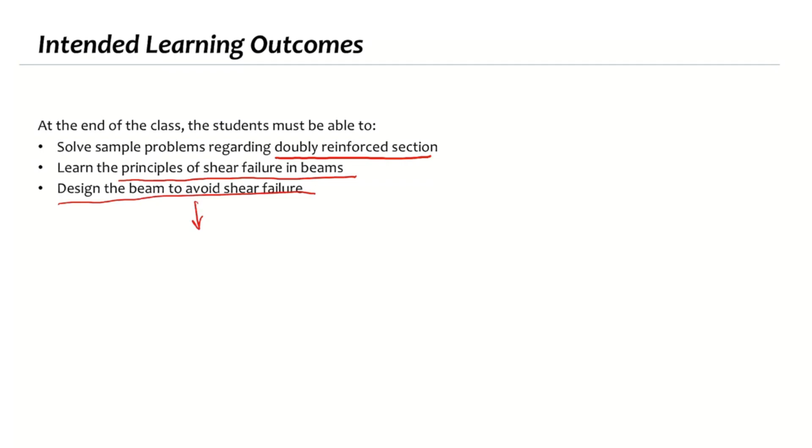Our intended learning outcomes for this module are that by the end, students must be able to solve sample problems regarding doubly reinforced sections, learning the concept behind doubly reinforced sections. We will also learn the principles of shear failure in beams, why shear failure is more dangerous than flexure failure, and how to design the beam to avoid shear failure by designing the spacing of stirrups.

Now let's talk about doubly reinforced beams. Doubly reinforced beams are those that have reinforcement on the compression side. Why do we need to provide reinforcement on the compression side? That is because our concrete is not enough to provide the necessary compression force to counteract the tension.

What we learned so far is that we have compression and tension in our beam, and compression is equal to tension. When solving a singly reinforced section, we always start by saying compression force equals tension force. However, if we increase our tension force, it will result in a corresponding increase in compression force, because compression equals tension. So if tension increases, compression must also increase - both of them must increase.

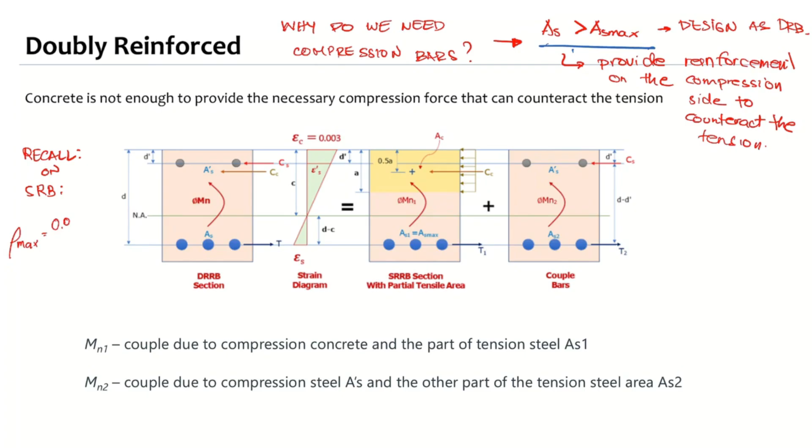Okay, let us recall singly reinforced beams. Recall on SRB, what is our maximum steel ratio for the singly reinforced condition? Maximum steel ratio for singly reinforced condition, rho max. I will give the first part: 0.85 FC prime beta over Fy.

What is the factor here? What is the factor for rho max? That will be 3 over 7. And this maximum steel ratio for a singly reinforced beam is taken at a corresponding strain of 0.004. It is taken at a corresponding strain of 0.004.

However, we also have another ratio, which is what we call rho 5. That Ro 5 is taken as 0.85 FC prime beta 1 over Fy. What is the factor for rho 5?

It is 3 over 8. And what is rho 5? Can you give me an explanation on what is row 5? What is row 5?

That is the maximum steel ratio for a tension controlled condition, no? So that means we can say that this rho 5 is the maximum amount of reinforcement for an SRB, for a singly reinforced beam with tension controlled condition.

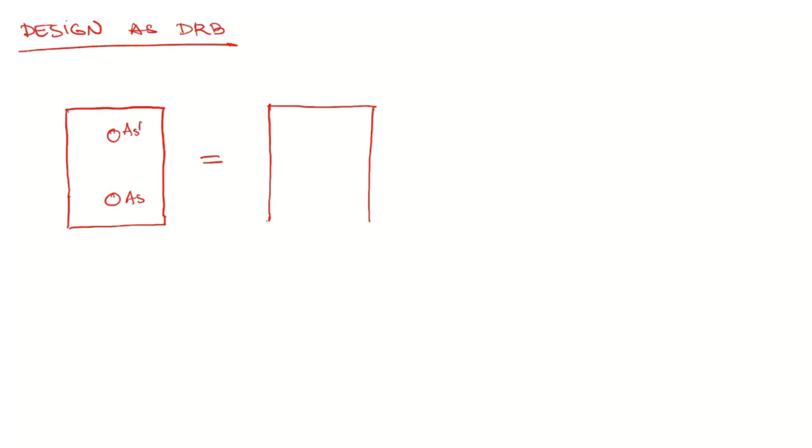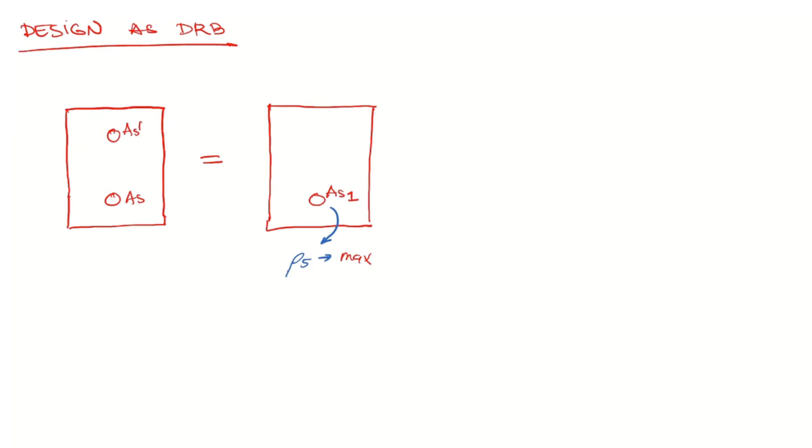So what we are going to do is divide them into two types of section. The first section will be the maximum singly reinforced beam for a tension controlled condition, and we are going to provide that AS1. So we will provide AS1, and this AS1 will be based on what we call rho 5. That rho 5 is your max amount of reinforcement

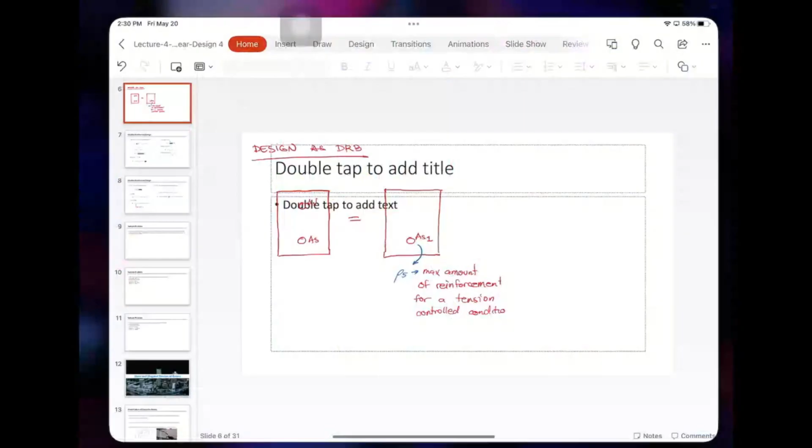For a tension controlled condition. Okay, so that is the maximum amount of reinforcement for a tension controlled condition.

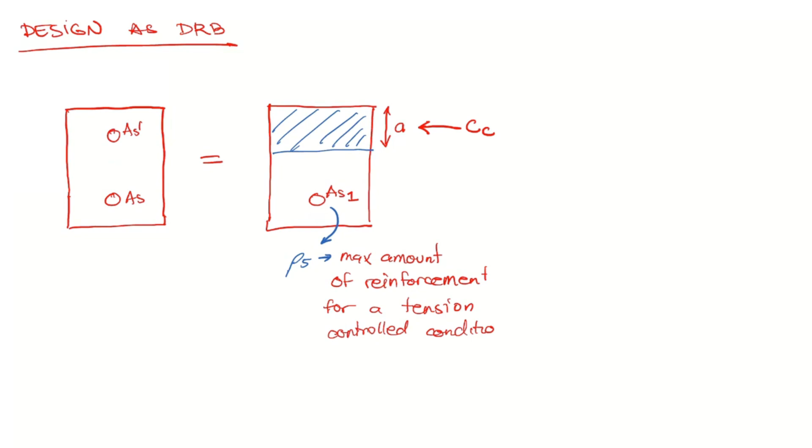So that AS1 will be counteracted by your compression. It will be counteracted by your compression due to concrete, or compression block as we call it. And it will have a depth of A. Compression block or compression due to concrete is acting at the center of the compression block. And we have tension at the bottom, which is T1. The distance between the compression due to concrete and T1, that will be D minus A over 2.

And this is actually our singly reinforced beam, SRB. And this is SRB and tension controlled condition. That is SRB and at the same time tension controlled condition.

And then we are going to add additional compression steel because our concrete cannot handle the compression anymore. So in doubly reinforced, we want to add more tension bars. So we will add tension bars which is AS2. However, our concrete cannot provide the necessary compression force anymore. That is why we are adding what we call AS prime. So AS prime is your compression steel. So your compression steel will have a corresponding force of CS, and then this will have a corresponding tension of T2. So the distance between the two forces will have D minus D prime.

Okay. So looking at section 1, section 1 will produce a moment due to the compression in concrete and the tension at the bottom, AS1, it will have a corresponding moment equal to MN1. It will form a moment because of the couple. And then section 2 will also form a moment because of the couple. It will form another moment MN2.

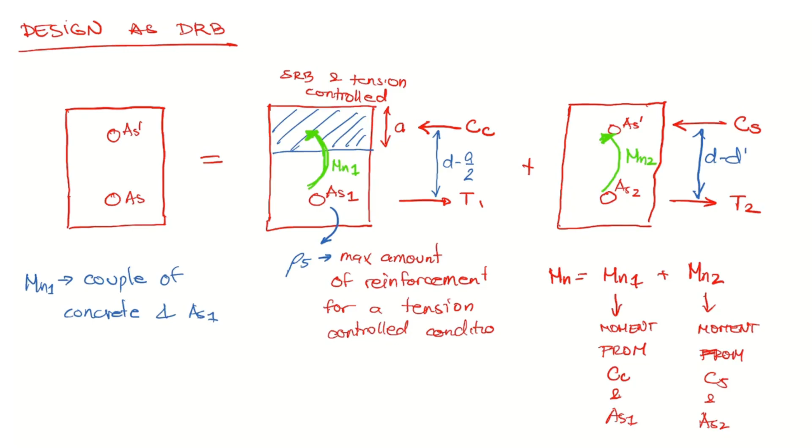Again, Mn1 is coming from your couple, that is the couple of concrete and AS1. Mn2 will be the couple of compression bars and AS2, additional tension bars. So that is the concept of doubly reinforced.

Take note that for section 2, we are not considering the concrete anymore. Because yung concrete natin, nagamit na natin sa section 1. Pag-a-addin mo sila, hindi po pwedeng maging redundant, no? We are not considering the concrete.

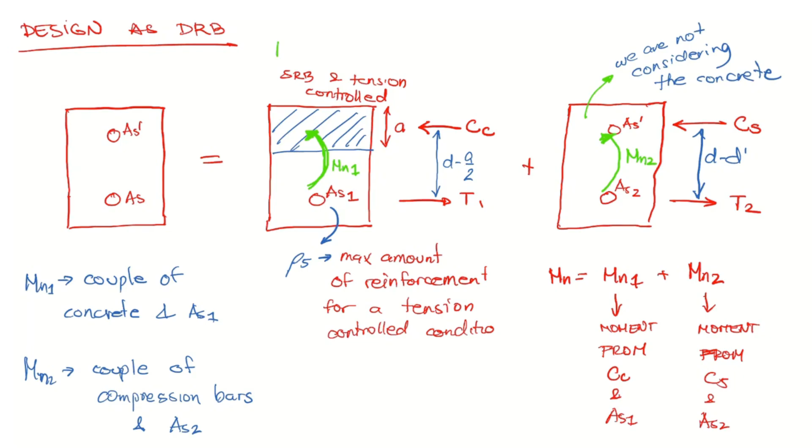Again, simplifying, this is your max for SRB. The first one will be max for SRB with tension controlled condition. And whatever is the excess moment from SRB, it will be carried by your compression reinforcement. Whatever is the excess from your singly reinforced beam, it will be carried by your compression reinforcement.

So far, are we clear with the concept of DRB? Do we understand? We get the maximum for SRB. Whatever is the excess, kung ano man yung sumobra doon, it will be carried by your compression steel. Because your concrete cannot carry it anymore, hindi na kaya ni concrete. So, tulong yung compression steel. That is the main concept of our doubly reinforced beam.

So how do we calculate the reinforcement for doubly reinforced design? You already know na meron po tayong two sections that we are considering. So let me just draw it here. Coming from AS and AS prime, we are going to consider two sections: one with concrete, that is AS1, plus another section with AS2 and AS prime.

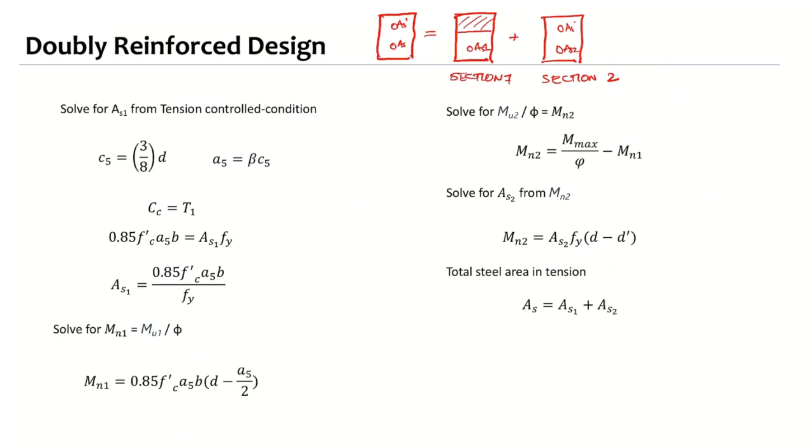This is section 1, section 2. So the first step is to solve for AS1 coming from tension controlled condition. We already know that for tension controlled condition, the maximum strain or the minimum strain that we can consider is 0.005. And we learned from our discussion on singly reinforced beams that if we are considering a strain of 0.005, your C, your depth of neutral axis, is taken as 3/8 of D.

Saan na nga po galing yung 3/8 of D? Where do we get the 3/8 of D? Based on our discussion in singly reinforced. Where do we get that relationship? Let me give you a hint.

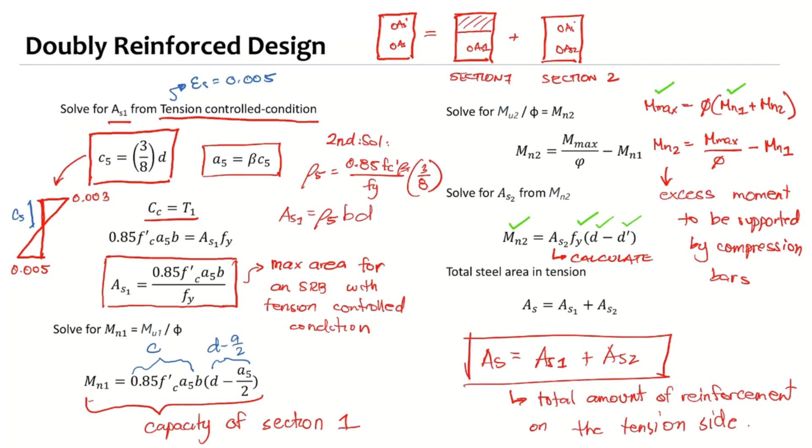And to calculate for the amount of compression bars, the first step will be check the strain of the compression bars. I-check po natin yung strain ng compression bars by using a simple formula. Fs prime is equal to 600 multiplied by C minus D prime over C.

So if yielding, then Fs prime will be equal to Fy. And Mn2 is equal to As prime Fy minus 0.85 Fc prime. This is actually your compression steel force, stress multiplied by area. Later you will learn kung bakit po may minus na 0.85 Fc prime yan. Multiply by the lever arm, D minus D prime.

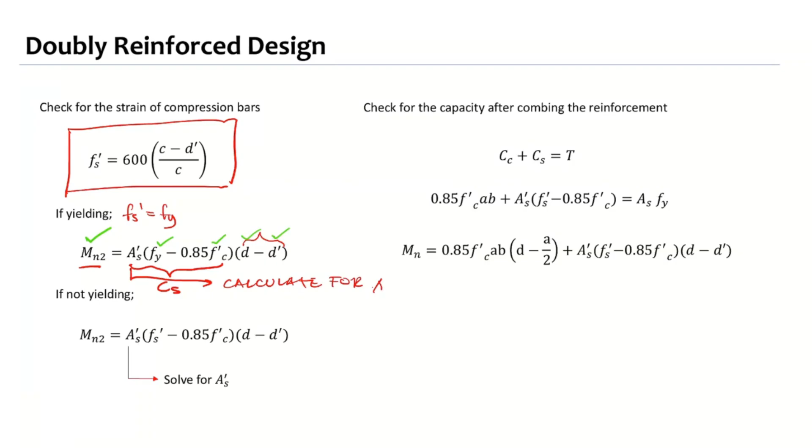So using this equation, since Mn2 is given, you have Mn2, you have Fy, you have Fc prime, you have D prime, you can now calculate for As prime. Calculate for As prime, you can now solve for the amount of compression reinforcement.

You can now solve for the amount of compression reinforcement.

If not yielding, then you use Fs prime. If your bars are not yielding, then you use your Fs prime that you calculated from strain. Then whatever this value is, you plug it in here. So As prime multiplied by Fs prime minus 0.85 Fc prime, D minus D prime.

Again, you can solve for As prime. You can calculate for As prime. So solving for this As prime, that is the amount of compression reinforcement.

That is the amount of compression reinforcement. So if you have As prime and As, then you already design your section. The last step will be to calculate or check the capacity after combining the reinforcement. This checking for capacity is what is our analysis approach. So after you have the tension bars and the compression bars, you can calculate the capacity again by using analysis approach.

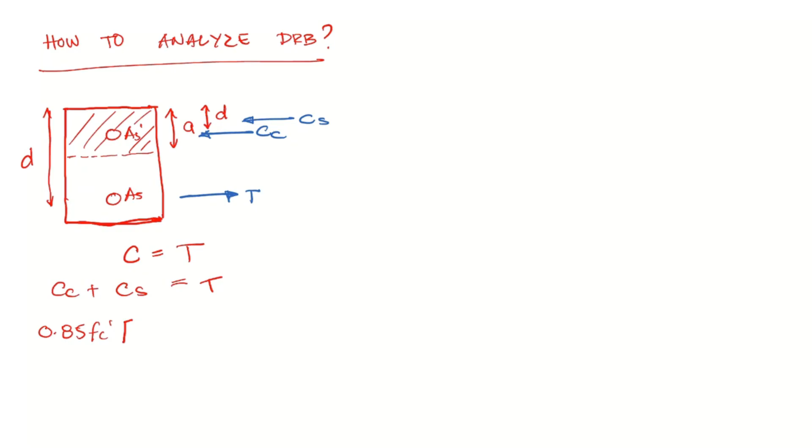The area of the concrete, what's the area of the concrete? A multiplied by B. However, recall when we discussed working stress design in doubly reinforced, strength design or working stress design, is that the area of the concrete — is that the proper area of concrete?

Why is it no? Because there is concrete that will be displaced due to compression steel. That is correct. Because the concrete, we need to consider that there is a concrete area displaced by compression steel. So there is an area removed because of the hole. Because you made a hole in the concrete, there is area lost there.

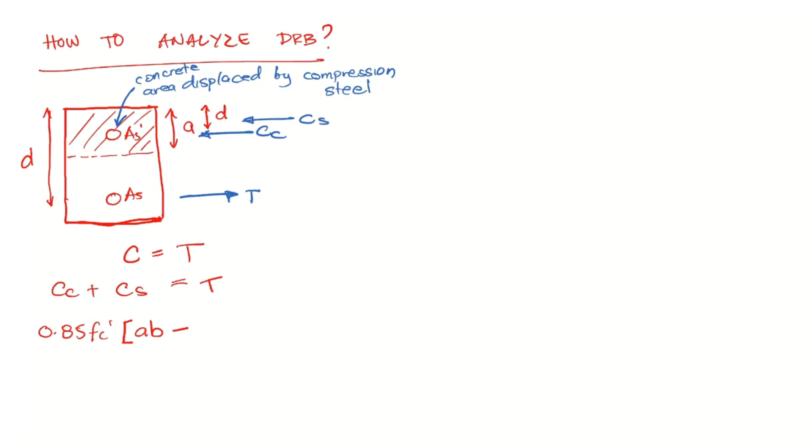So there is a concrete area displaced by compression steel. So we need to deduct what area we are going to minus here. What is the area of the compression steel? As prime. We need to deduct As prime, plus consider As prime, that will be As prime Fy equal to tension, which is As Fy. Simplifying the equation, we have 0.85 Fc prime multiplied by AB minus 0.85 Fc prime multiplied by As prime plus As prime Fy is equal to As Fy.

Combining As prime, let's combine the two As prime terms. So we have 0.85 Fc prime AB plus As prime multiplied by Fy minus 0.85 Fc prime, equal to As Fy. So this is now our equation, and coming from this equation, we can now solve for A.

So that is why we have a minus 0.85 Fc prime in all of our compression steel calculations. You will notice that in all of our formulas for compression steel force, we always have a minus 0.85 Fc prime. Going back to our design, this term, 0.85 Fc prime, is actually provided to consider the concrete displaced by the compression steel — or in simple terms, that is to consider the hole. That minus 0.85 Fc prime is provided in order for us to account for the hole of the reinforcement.

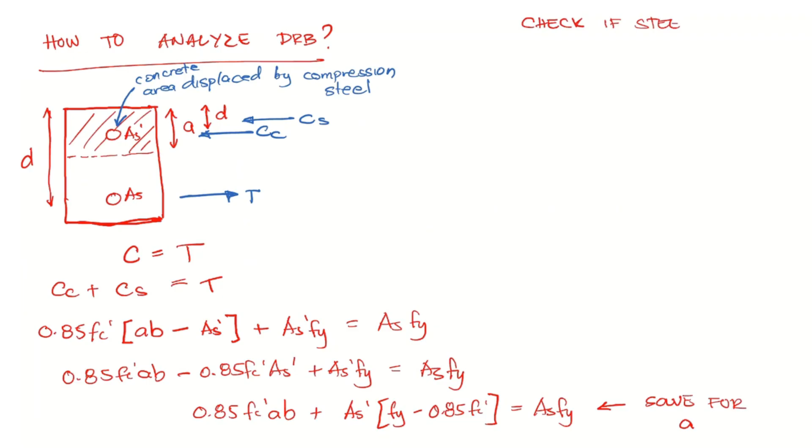So after we solve for A, what is the usual next step in analysis? Based on what we learned in singly reinforced beams, you solve for C, then check if it still yields. That is correct. So the next step will be to check if it still yields. However, this time we have two steel: compression and tension steel. So for tension bars first, we need to check for Fs. Fs can be checked as equal to 600(D minus C)/C.

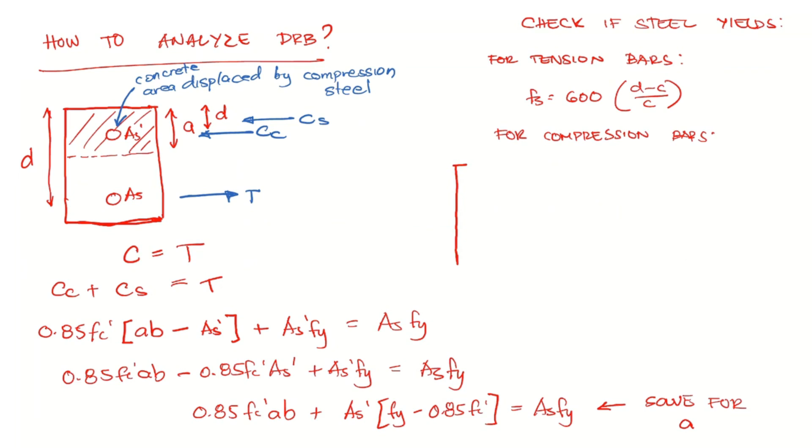On the other hand, for compression bars, we are going to consider again the strain diagram, also called strain compatibility. So this is our neutral axis, and this is the depth C.

And this is your strain, ES. This is 0.003, this is ES prime, the strain in compression steel. And the depth of the compression steel is D prime. So taking the ratio, that will be 0.003 over C is equal to strain ES prime over C minus D prime. Solving for ES prime, that is equal to 0.003 multiplied by C minus D prime over C. So that's how you calculate for the strain in compression steel.

And to calculate for Fs prime, the stress in compression steel, you just multiply it with 200,000 megapascal. You will have 600 times C minus D prime over C.

So if not yield, what if your section is not yielding? What is the next step? If not yield, kapag hindi nag-yield, what are we going to do? What is the usual thing that we are doing in singly reinforced beam? Not yield, resolve for A. What we are going to do is to substitute this to Fy. We are going to change this value right here. We substitute that, we substitute the whole term, and then we are going to resolve for A.

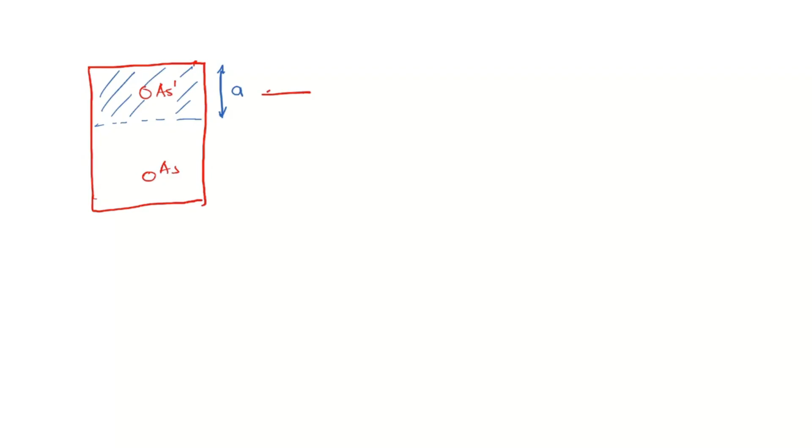Then after you check, after all your assumption is correct, we are now ready to calculate the capacity. To calculate the capacity, you go back to your section, the section that you're analyzing. So you have AS, and then you have AS prime. You have the compression block, this is compression block A. You have the compression in concrete, you have the compression in steel, you have the tension.

This will be, we are going to set this as our axis of rotation. This will be our axis of rotation. And remember, if you have three or more forces in your beam, then what you can do is take the moment at the axis of rotation to calculate for the capacity.

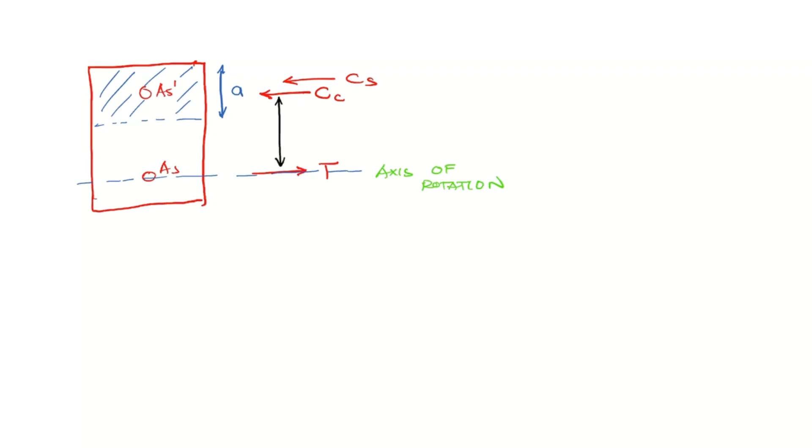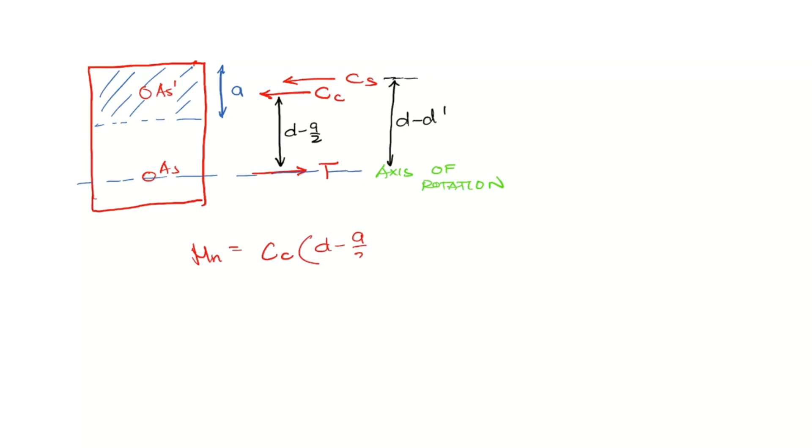So the distance from the compression of concrete to the tension steel, that is D minus A over 2. And the distance coming from the compression steel to the tension steel, that is D minus D prime. So to calculate for the nominal moment, that will be equal to compression in concrete multiplied by D minus A over 2, plus compression in steel, D minus D prime.

Substituting the values, that will be compression in concrete, 0.85 FC prime, AB, multiplied by D minus A over 2, plus compression in steel, that is AS prime multiplied by Fy. Take note, you need to deduct 0.85 FC prime to consider the whole, minus 0.85 FC prime, multiplied by the distance, that is D minus D prime. So this will be your formula for your nominal capacity.

Any questions so far?

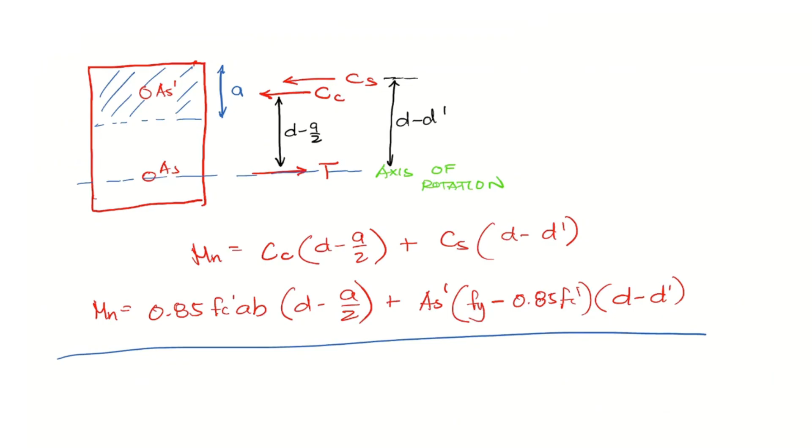So let's try to answer some sample problem. Determine the theoretical area required for tension of a rectangular section with width B of 350 millimeters and effective depth 700 millimeters under a factored moment of 1500 kilonewton meter. If the compression steel is required, it will be placed 70 millimeter from the compression fiber of concrete. Use FC prime 28 megapascal and FY 420 megapascal.

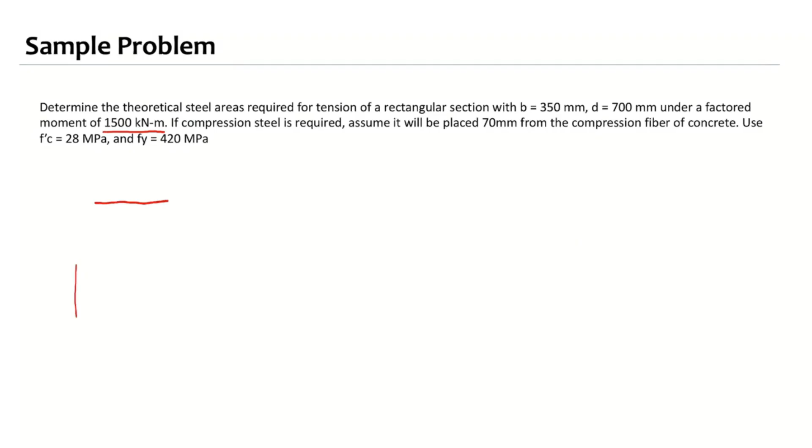So first of all, let's analyze our problem. Just to recall the concept that we discussed. We have, this is a design approach problem. This is a design problem.

So we have our section with a corresponding AS, and then we have AS prime. The effective depth or depth of the compression block is 70. The depth of the compression steel is 70 millimeters, so that is D prime. The effective depth of AS is 700. The width of the section is 350.

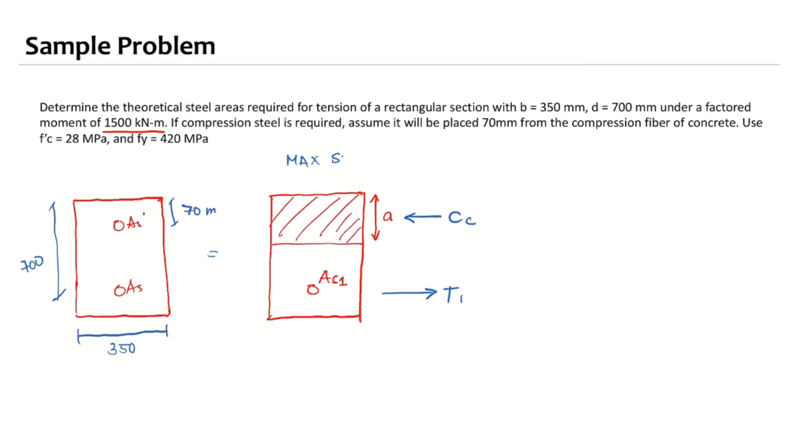This will be transformed into two types of section. The first section will be the maximum SRB for tension controlled condition. At depth A, we have compression due to concrete, and then we have AS, this will be AS1. We have a tension here, that will be tension 1. And this is your max SRB for tension controlled.

And then we are going to add to this a corresponding additional reinforcement. This one, we have AS2, and the compression that will counteract AS2 will be dependent on your compression bars, so we have AS prime. So we have here CS, and this is T2.

The first section will have a corresponding nominal moment Mn1. The second section will have a corresponding nominal moment of Mn2. So Mn1 plus Mn2, that is our total capacity. And what this will carry is the 1,500 applied to our section, 1,500 kilonewton meter.

This is for our excess moment. So the first thing to do here is to determine AS1. Calculate AS1.

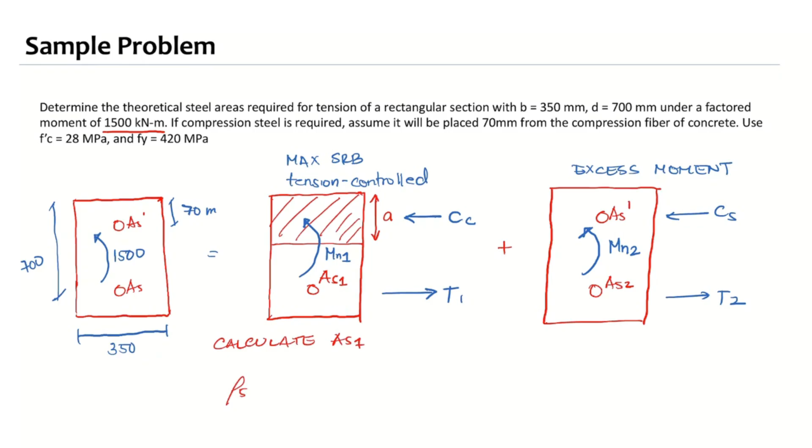We can calculate AS1 by using rho s. Rho s is equal to 0.85 of FC prime beta 1 over Fy multiplied by 3 over 8. That is 0.85 of FC prime, that is 28, multiplied by beta 1, 0.85, divided by Fy, 420, multiplied by 3 over 8.

What's the rho? Do not round off. Also, all of you should calculate now. You should have calculated already. Hold on to your calculator and calculate with me.

We can now calculate AS1. AS1 will be equal to rho s BD. So AS1 is equal to rho s, which is 0.0180625, multiplied by the width, that is 350, multiplied by the depth, 700. So what is AS1? 4425.3125 millimeters squared. So we can now calculate for the capacity.

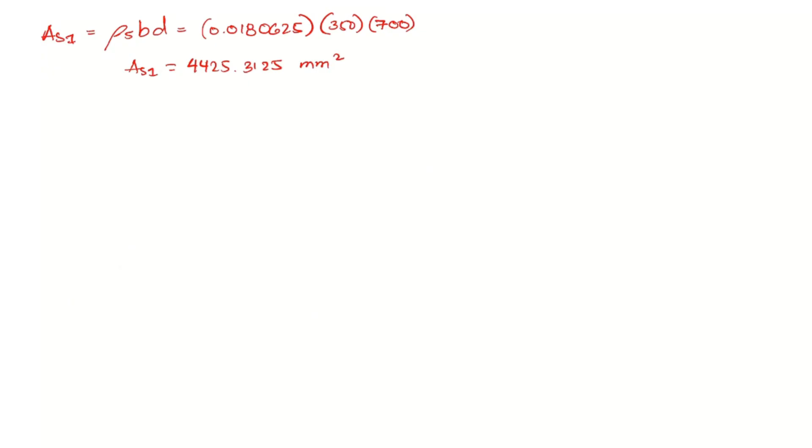This is just an analysis approach. We have AS1 and then we have a singly reinforced beam with the depth of A. This is 350 and this is 700. So this is just an analysis approach. We have compression due to concrete and we have T1.

Okay, so equating compression due to concrete is equal to T1. That will be 0.85 of FC prime AB is equal to AS1 Fy. So substituting the values, we have 0.85 of FC prime, which is in this case 28. We don't know A. B is 350. AS1 is 4425.3125, multiplied by Fy, that is 420. Calculating for A,

223.125 millimeters. Then we can now calculate for C, that is A over beta 1, 223.125 over beta 1, which is 0.85, giving us 262.5.

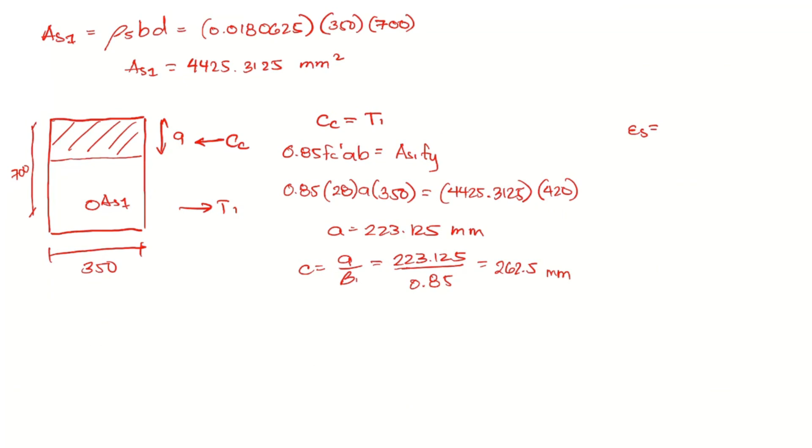In terms of analysis, the next step is to actually check for our stress. However, in section 1, if we are going to calculate for the stress, let's try to calculate. First, let's calculate for the strain: 0.003 multiplied by the effective depth, 700, minus 262.5, over 262.5.

This is equal to, what's the value? 0.005, because we are considering the maximum steel area for a tension controlled condition, so we are expecting an exact 0.005 value. And also for Fs, that is 600 times D minus C over C. If we calculate for Fs, that is equal to 1,000 megapascal. So as you can see, it is always yielding.

If you are considering a tension-controlled section, the steel bars are always yielding, surely yielding. So I'm going to note here: calculating for strain S and Fs in this condition for section 1 is not required. It's not required since for strain S equal to 0.005, the tension or the bars are surely yielding. I just showed you that they are surely yielding.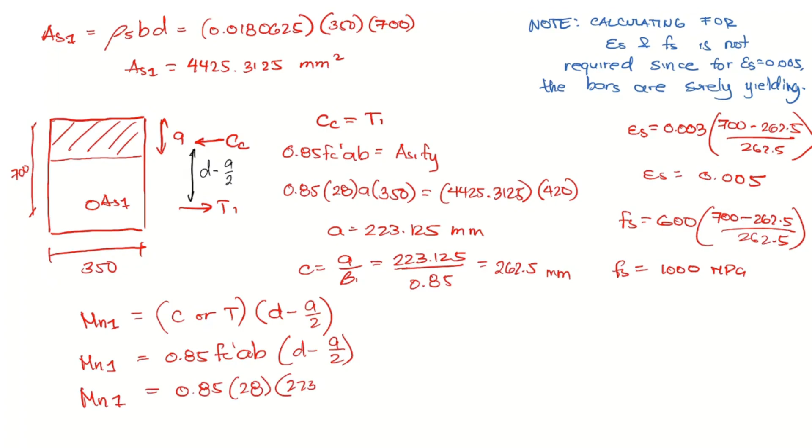Value of A is 223.125. B is 350. Effective depth is 700 minus 223.125 over 2. What is our Mn1?

We have 1093.69 kilonewton meter. And as you can see, we are designing for a moment of 1,500.

However, the maximum capacity for a singly reinforced section that we have is only 1,093. So ibig sabihin may sobra, may sumobra po. So that excess will be counteracted or resisted by your compression bars, kasi nga po may sumobra. Okay, may sumobra.

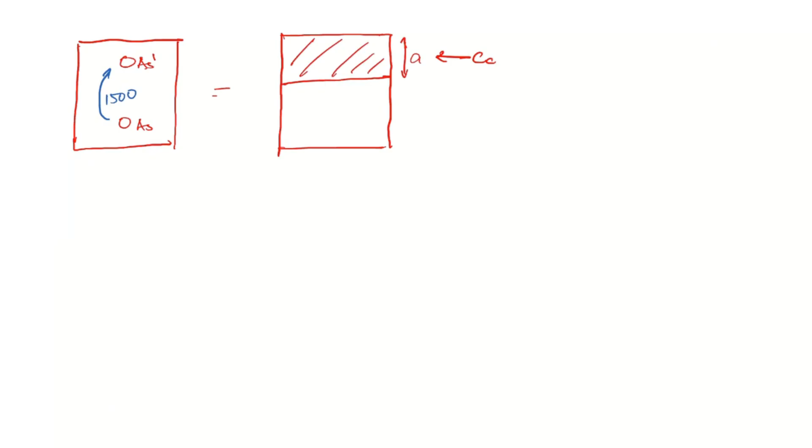We have the first type, which has depth of A, compression of concrete, tension in steel. This is AS1, tension in steel T1. Plus another section with AS2, this is T2, this is compression in steel. The distance between the two is D minus A over 2, and this is D minus D prime.

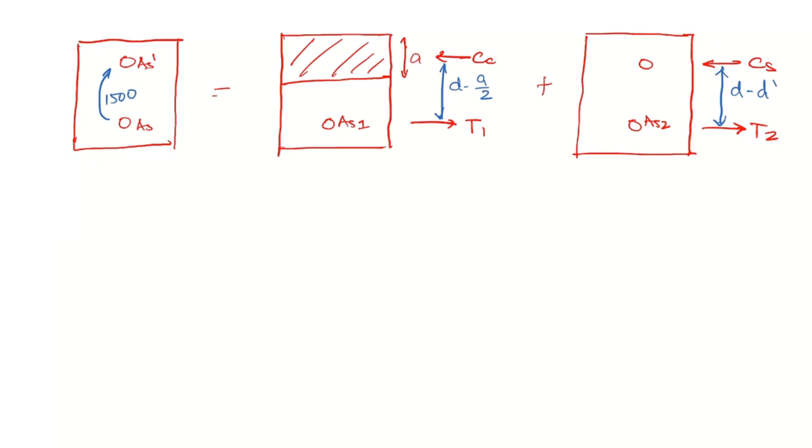D minus D prime. Okay, so the first section will form a moment equal to Mn1. The second section will form a moment equal to Mn2. So our Mu, which will be resisted by Mn1 plus Mn2,

we can now calculate for the excess moment. By using this equation, we can calculate for the excess moment to be resisted by compression bars. The excess moment to be resisted by compression bars.

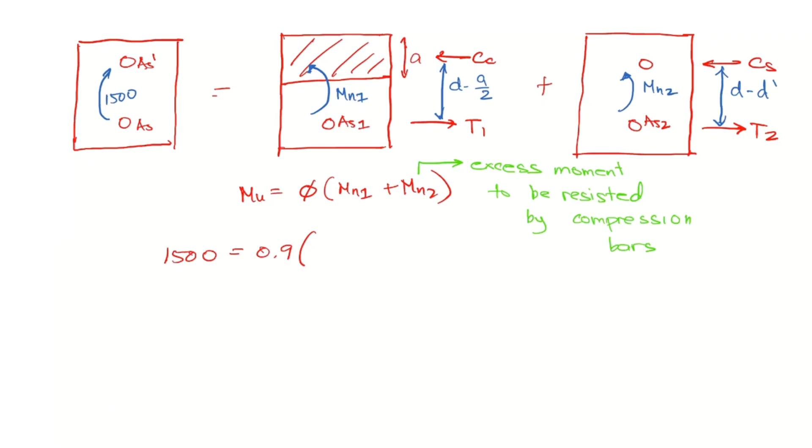So substituting the values that we have for MU, that is 1,500 equals phi. This is 0.9 because as you can see, we are designing for a tension controlled condition. Nagde-design po tayo ng tension controlled condition, that is why it is 0.9. So 0.9 multiplied by

1093.69 plus Mn2. Calculating for Mn2, what's the value of Mn2? 572.98 kilonewton meter. Okay? 572.98 kilonewton meter.

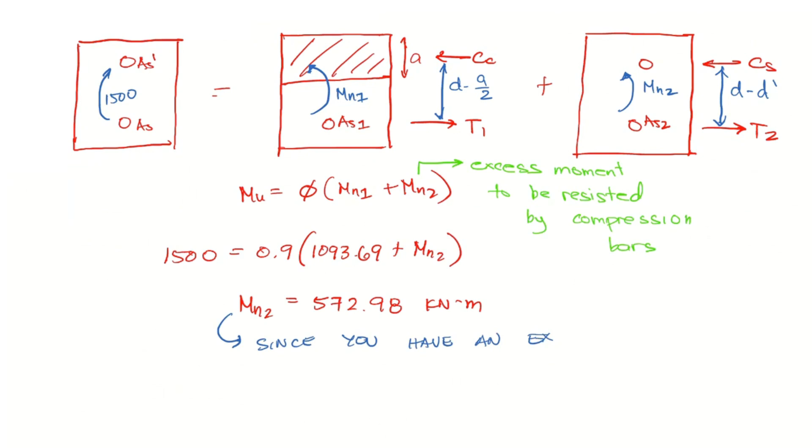So as you can see, since you have an excess moment, that means you need to design as DRB, design as doubly reinforced beam. Okay, so I will give you a what if consideration.

So what if your MU is less than phi Mn1? What is your conclusion? Based on what we discussed, your section 1 can already carry your applied ultimate moment. Again, section 1 can already carry the applied ultimate moment, if MU is less than phi Mn1.

Is James Patrick my only student? Is this my only student? How about the others? Ninyo Mark, Sabote, Hansel, Rabino, Mark Lindon, Pineda.

Okay, so you can now design as SRB, design as singly reinforced beam. So kapag po yung MU nyo, yung maximum applied moment is less than the capacity of only section 1, Mn1, then you can just consider singly reinforced beam. Only consider singly reinforced beam. Okay?

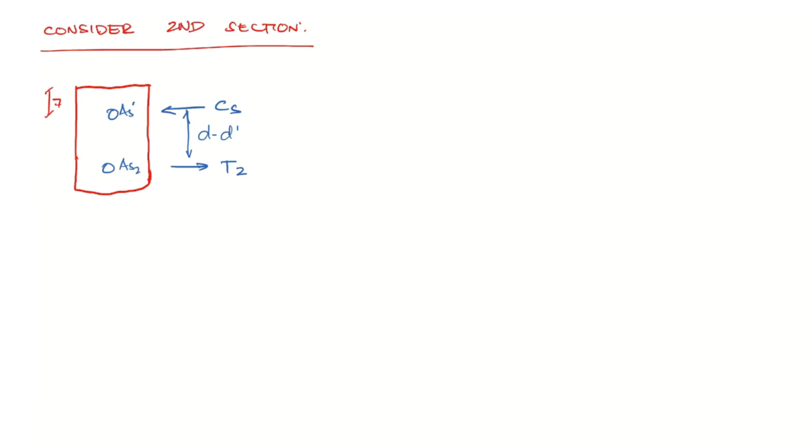This is T2. The distance between the two will be D minus D prime, because this is D prime. The D prime is actually 70. This is 70 and this is 700. 70 and 700.

So what we can do is that we have Mn2. Mn2, nominal na po ito, no? So you don't need to add a phi factor. Mn2 is equal to AS2 Fy multiplied by D minus D prime. The force multiplied by the distance. Force multiplied by distance. So we have Mn2.

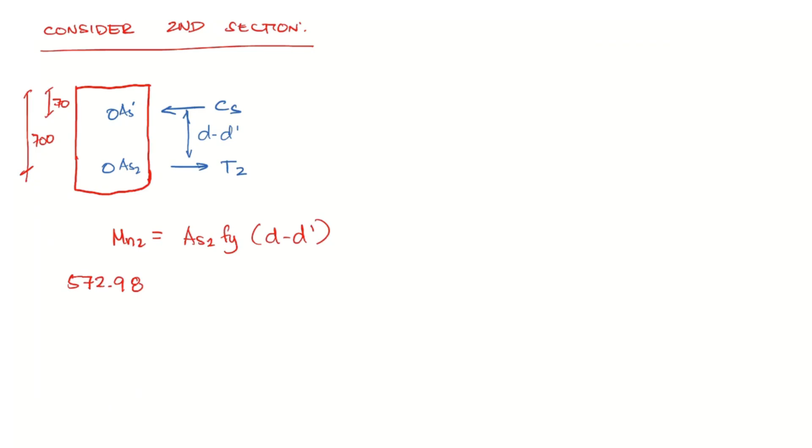We have the value of Mn2, that is 572.98, multiplied by times 10 raised to 6 to make it Newton millimeter. And then AS2, that is unknown. We don't know AS2. Fy will be 420 multiplied by D, that is 700 minus 70.

Take note that Fy is surely yielding, surely yielding because since tension controlled, no? Since tension controlled. So given from this equation, you can now solve AS2. What is AS2? 2165.46.

And then after calculating for AS2, you can now calculate for the total tension reinforcement, that is AS1 plus AS2. AS1 is 4425.3125 plus 2165.46. What is our total tension reinforcement? 6590.77.

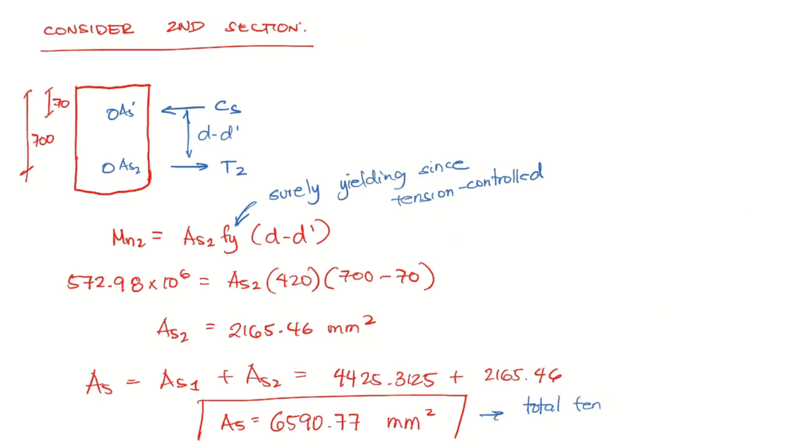So this is the total tension reinforcement. That is the total tension reinforcement. And then you can now solve for the compression steel.

You can now solve for the compression steel. Going back to our section, we have AS2, AS prime, CS and T2. So we can equate CS is equal to T2.

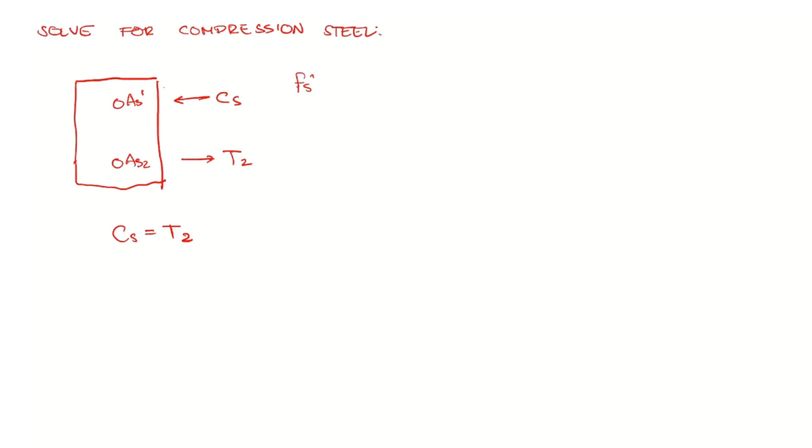However, we need to check if our compression steel is yielding or not. Calculating for Fs prime, that is 600 times C minus D prime over C. C is 262.5, minus 70, over 262.5. What is our Fs prime? 440. So 440 is greater than 420, so this is yield.

Yield. So now let's equate CS is equal to T2. CS is AS prime multiplied by Fy. Take note, you need to deduct 0.85 of Fc prime to consider the hole, which is equal to T2, that is AS2 times Fy.

Substituting the values, we have AS prime, Fy is 420 minus 0.85 of 28, is equal to AS2. We have AS2, 2165.46, multiplied by Fy, 420. What is AS prime? 2295.54.

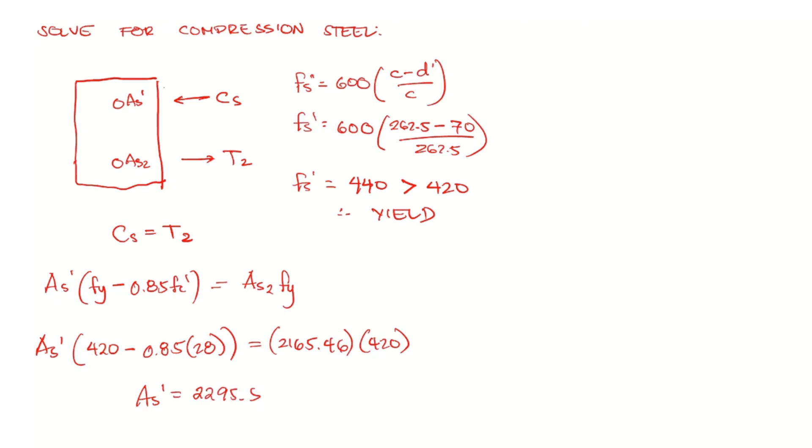2295.54 millimeters squared. So this is our total compression reinforcement. That is our total compression reinforcement. Our total compression reinforcement.

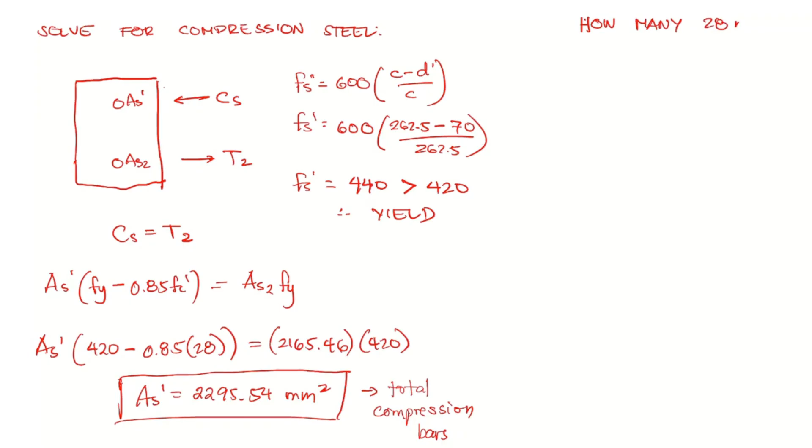Total compression bars. So if we're going to design our section, let's use 28 mm bars. Let's calculate the amount of 28 mm bars. So how many 28 mm bars? First, let's calculate for tension.

For tension, that is N is equal to AS over area of the bar. So AS for tension, that is 6,590.77 divided by area of the bar, pi over 4, 28 squared. What's N? 10.7, say 11 bars.

For compression, N will be equal to AS prime over area of the bar. That is 2295.54 over area of the bar, pi over 4, 28 squared. What's N? 3.73, say 4 bars.

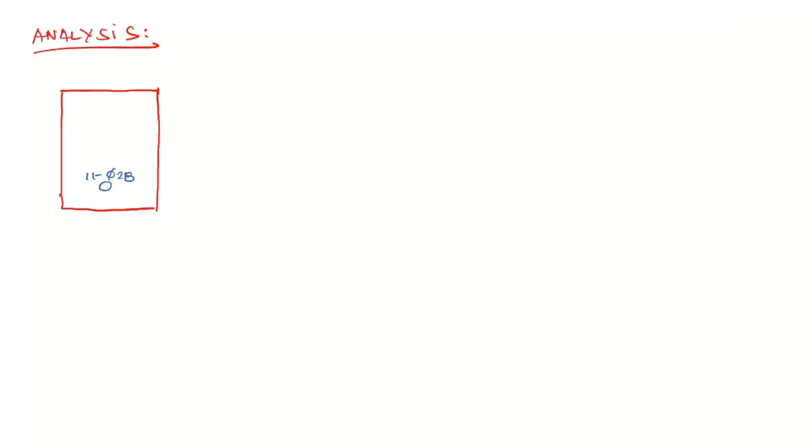So at the bottom we are going to provide 11 bars of diameter 28, and at the top we are going to provide 4 bars of diameter 28. This is at the depth of 700. This is 350.

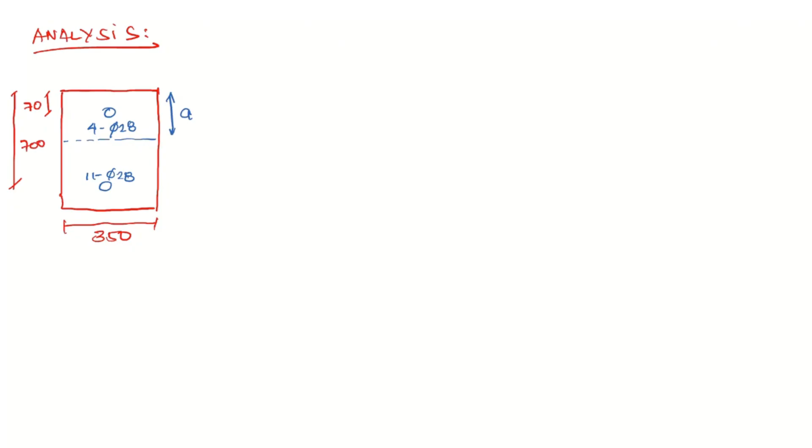So we have a compression block A, and we have a compression due to concrete, and then compression due to steel. Let's say this one, compression due to steel. And then we have the tension.

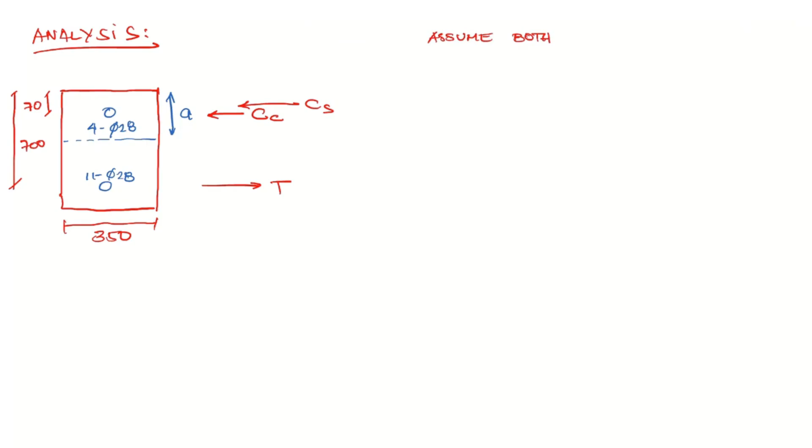So the first step in analysis is to assume both AS and AS prime are yielding. We assume first that they are both yielding because that is the easiest calculation. So if they are both yielding, we equate compression is equal to tension, CC plus CS is equal to tension.

So the compression in concrete will be given as 0.85 of FC prime AB plus compression due to steel, that is AS prime times Fy minus 0.85 FC prime. We are assuming Fy because we said to assume both top and bottom bars yield, so we use Fy, is equal to AS times Fy.

Substituting the values, we have 0.85 of FC prime, that is 28. We don't know A. The B is 350, plus AS prime, that is 4 bars of 28 mm, so 4 pi over 4, 28 squared, multiplied by Fy, 420, minus 0.85 of FC prime, 28, is equal to AS, that is 11 pi over 4, 28 squared, multiplied by Fy, 420.

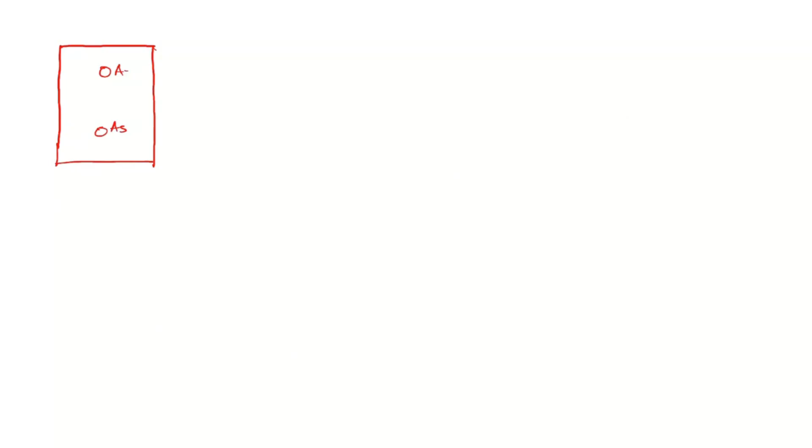So we have As at the bottom, As and then As prime. So this is our compression block, that is our compression block A. The depth of the compression bars is 70. The depth of the tension bars is 700.

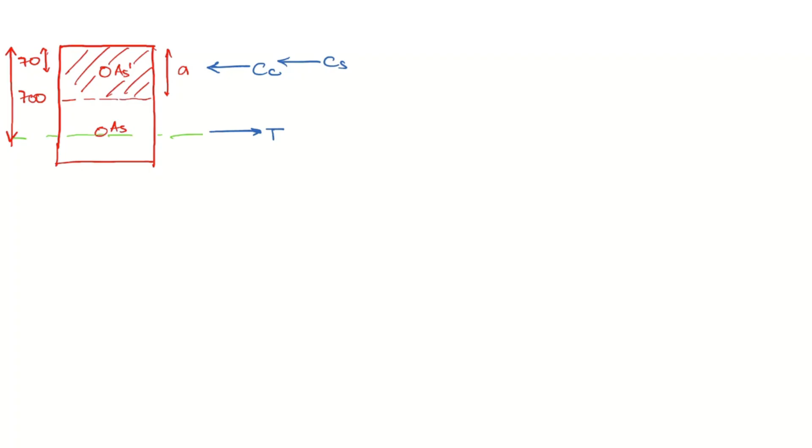So we have compression due to concrete. This is tension. And then we have compression due to steel, Cs. We are going to set the tension as our axis of rotation. This is our axis of rotation, and we are going to moment the remaining forces to this axis.

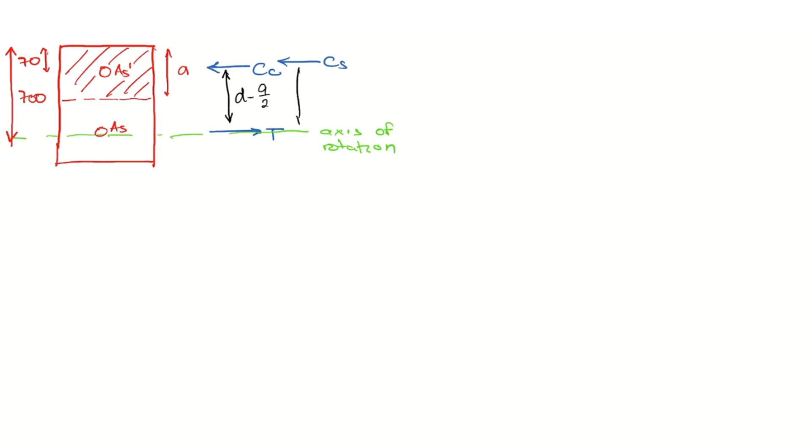Let's take moments. So the distance of this is D minus A over 2. This one is D minus D prime. Taking the nominal moment capacity, Mn, that is equal to compression due to concrete multiplied by D minus A over 2, plus compression due to steel, that is D minus D prime.

Substituting the values, Mn equals 0.85 Fc prime AB multiplied by D minus A over 2, plus Cs, that is As prime multiplied by, again because it is yielding, Fy minus 0.85 Fc prime, multiplied by D minus D prime.

So substitute the actual values: 0.85 of 28, value of A is 224.36, with B is 350. This is 350 multiplied by the distance, that is 700 minus A over 2, 224.36 over 2, plus As prime, that is 4 times pi over 4, 28 squared, Fy that is 420 minus 0.85 of 28, multiplied by D minus D prime, 700 minus 70. What is our nominal moment capacity?

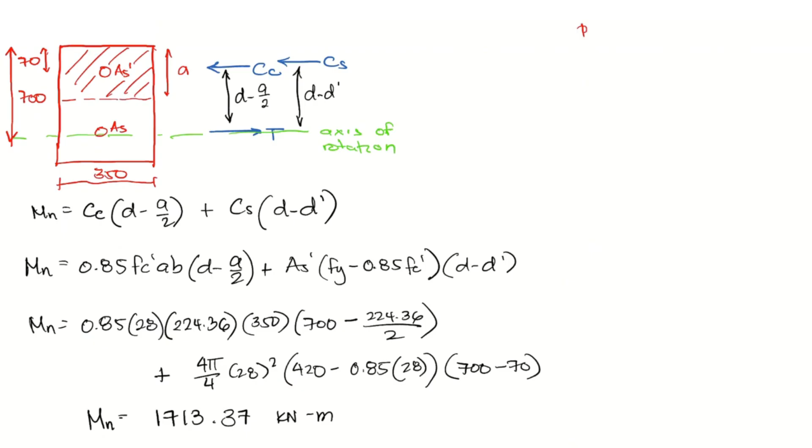And then to calculate for the ultimate moment, we need to calculate for the reduction factor. The reduction factor is dependent on the strain, so we need to solve for strain, that is 0.003 (D minus C) over C.

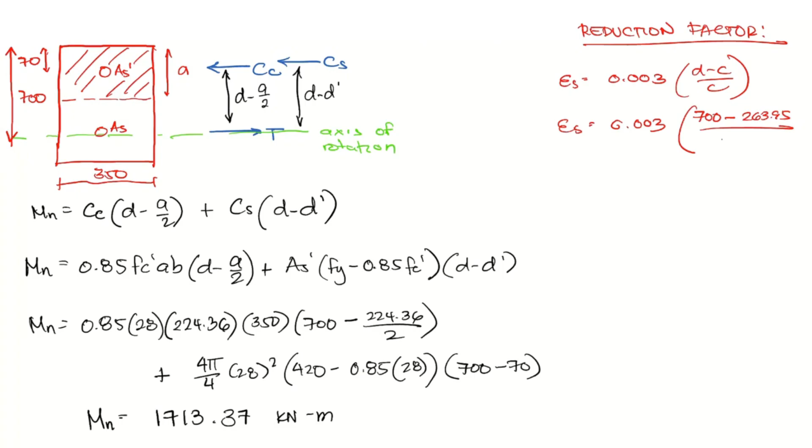Strain is 0.003, effective depth is 700 minus C, that is 263.95, over 263.95. So what is our steel strain?

0.00496. So this is still less than 0.005, so this is transition.

Okay, so calculating for the phi factor for transition: 0.65 plus 0.25 of (strain steel minus yield strain) over (0.005 minus yield strain). So first, let's calculate for yield strain, that is 420 over 200,000. So this is 0.0021, if I'm not mistaken. Tama po.

0.0021. So substituting the values to calculate for phi, that is 0.25 of strain, 0.00496 minus 0.0021, over 0.005 minus 0.0021. What is our phi factor? 0.897.

Calculating for Mu, that is phi Mn. Our Mu now will be phi, which is 0.897 multiplied by Mn, 1713.37. What is Mu? 1536.89.

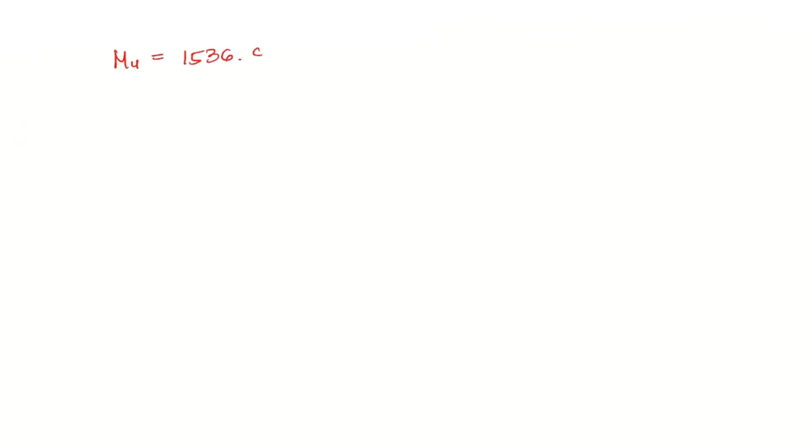1536.89. So that is the analysis approach, no? We already calculated for the capacity of our section. So if we are going to compare it with our design moment, our Mu is equal to 1536.89, and this is greater than our design moment.

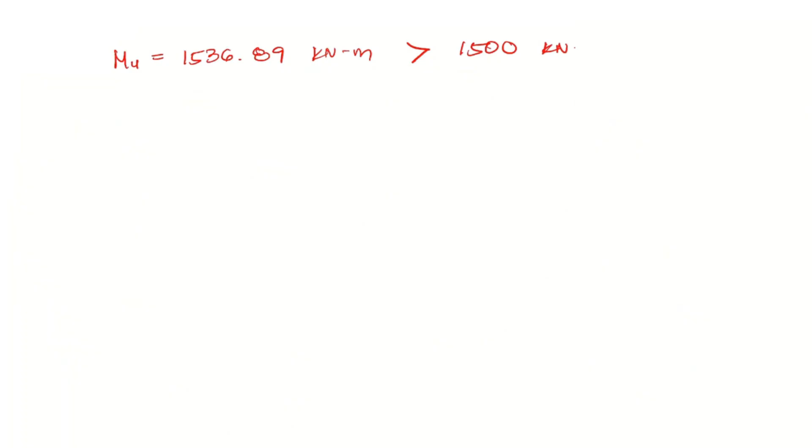We need to design our section according to our problem. We need to design it with 1,500. So that means it was designed properly because the capacity is greater than the ultimate moment. So that means the design is adequate.

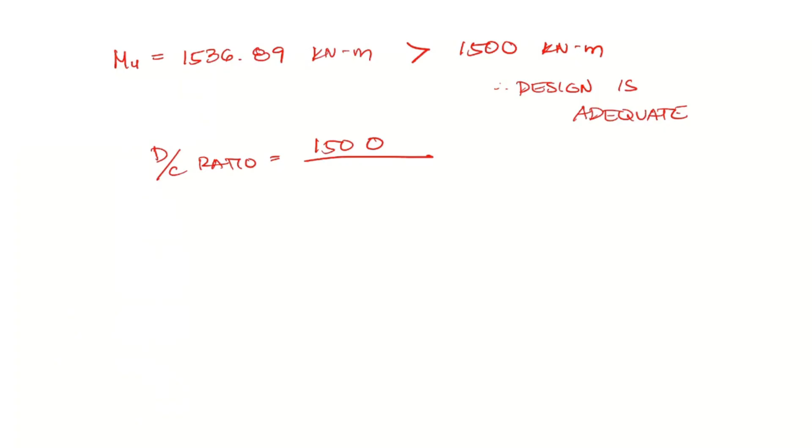The design is adequate. If the question is asking, what is the demand over capacity ratio? The demand will be the applied moment, 1,500, over the capacity, 1536.89. What is our DC ratio?

0.98. Or if I'm going to ask regarding the percentage, multiply by 100, 98%. Anyway, 98%. Take note, when in an exam, don't round off. Only round off at the final answer. So always use the stored value when it comes to quizzes and exams. This is 97.60.

Are we clear with this problem? Any question regarding the design? We already calculated the 11 bars and 4 bars. Any question? Did we get the idea? Did we get the concept here?

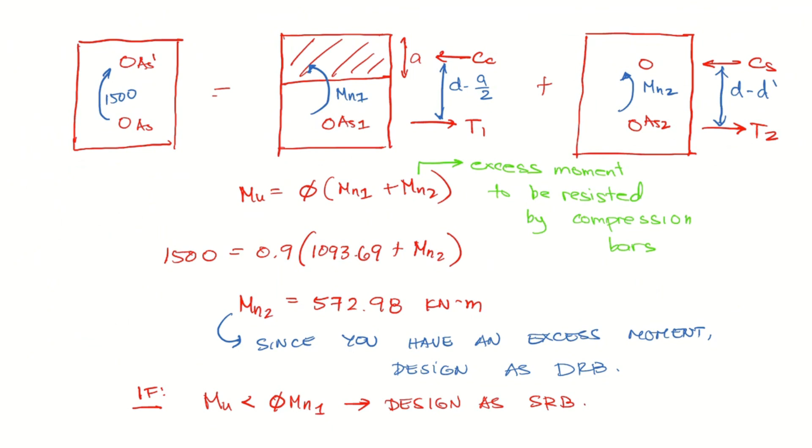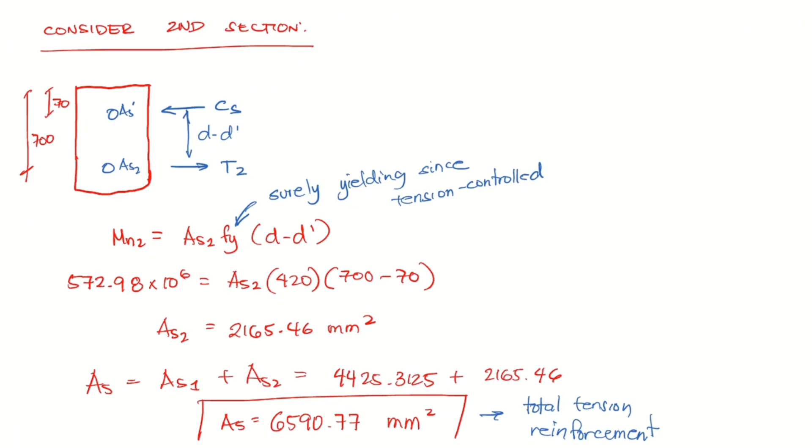That 572 is what is resisted by compression. That is why this is the nominal moment, Mn2 equals AS2, Fy, d minus d prime. You can solve for AS2. Once you solve for AS2, you can solve for the total tension reinforcement, AS1 plus AS2. Then you solve for the compression steel by equating CS equals T2.

So you can now get the compression bars. After you solve for the compression bars, you can now decide how many bars should be put in your section. Okay, this is the analysis approach. For the analysis approach, compression equals tension. Again, for analysis approach, that is just compression equals tension.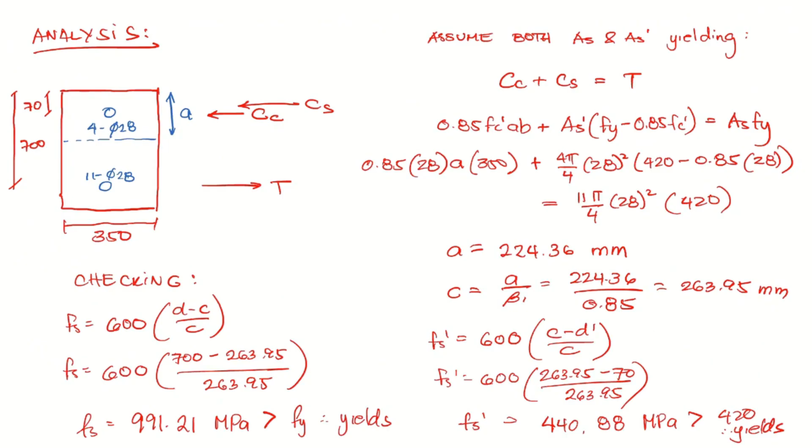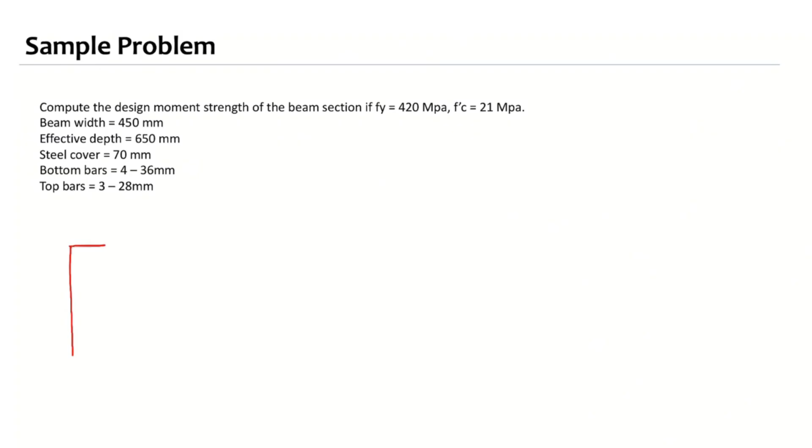So let's answer this next problem. Compute the design moment strength of the section. This is analysis approach. We have the beam width, effective depth, steel cover, bottom bars, and top bars. First, the beam width is 450. The effective depth is 650. And the top bars are at 70 millimeters.

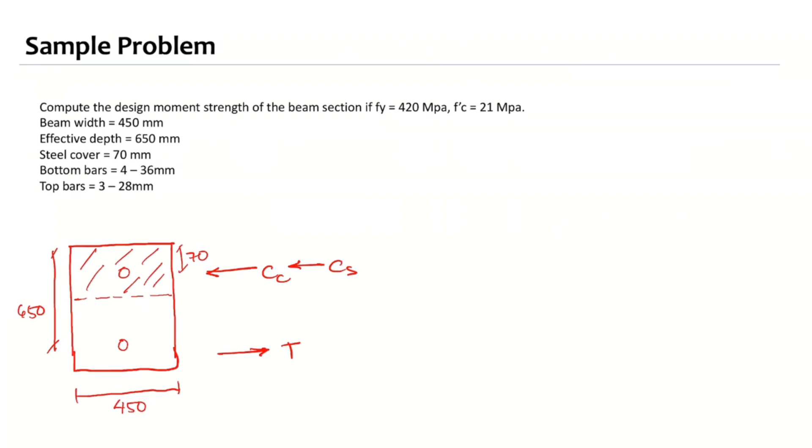So we have the compression due to steel, then we have the compression block, compression due to concrete, and then the tension at the bottom. So the first step in analysis approach is to assume both AS and AS prime yield. Assume both of them yield. So compression is equal to tension.

The compression, CC plus CS, is equal to tension. Compression due to concrete plus compression due to steel equals tension. The compression due to concrete is 0.85 Fc prime AB, plus compression due to steel, that is AS prime multiplied by Fy minus 0.85 Fc prime, equals tension, ASFy. Substituting the values, 0.85 of Fc prime, that is 21, times B which is 450, plus AS prime at the top bars, 3 pi over 4, 28 squared, times Fy, 420, minus 0.85 Fc prime.

Let me draw it here. We have 4 bars diameter 36 and 3 bars diameter 28. So at the bottom bars, we have 4 pi over 4, 36 squared, multiplied by Fy 420. Calculating for the value of A, what's the value of A? 120.41.

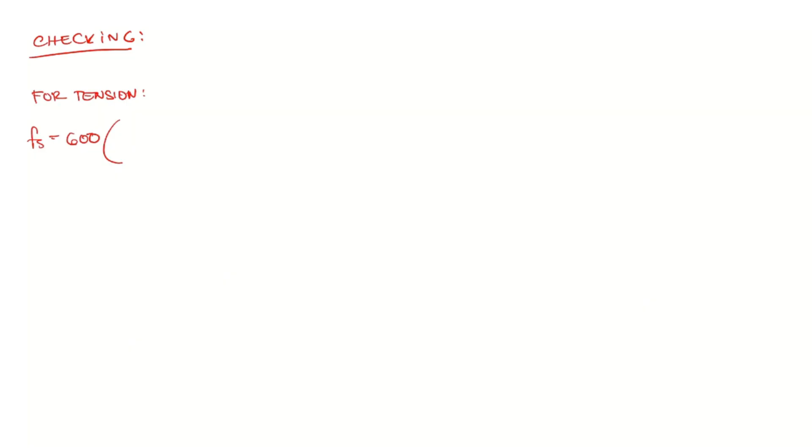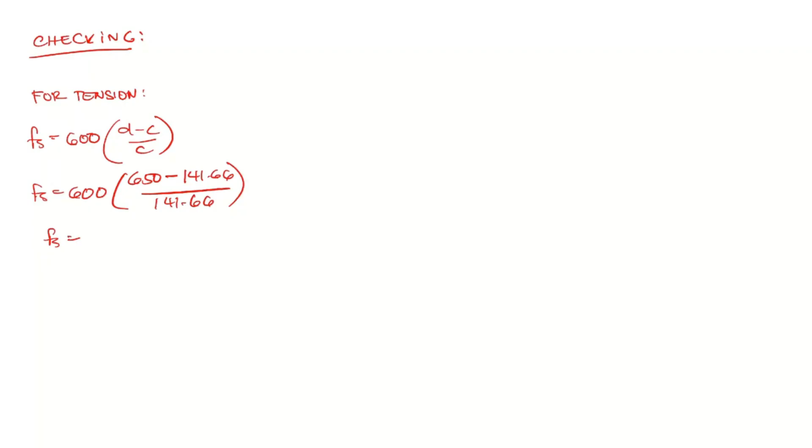Then the next step will be to check, checking if the steel really yields. So for tension, our Fs is equal to 600, d minus C over C. Our effective depth is 650 minus C, that is 141.66, over 141.66. What is our Fs? 2,153.07, and this is greater than 420, so we are sure that it yields.

On the other hand, for compression, our Fs prime is equal to 600, C minus d prime over C. So Fs prime equals 600, C is 141.66 minus d prime 70, over 141.66. What is our Fs prime? 303.52, and 303.52 is less than 420, so this is not yielding.

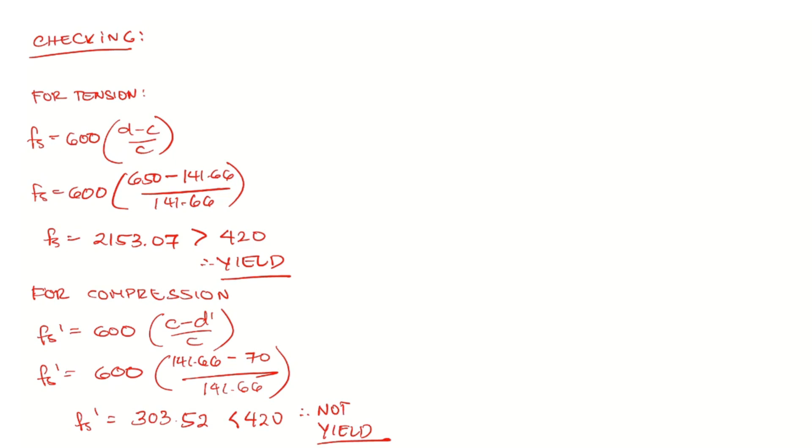What are we going to do if it's not yielding? We need to recalculate or recompute for A, because it's not yielding. So we are now going to consider not-yield conditions. Compression due to concrete plus compression due to steel equals tension. That is 0.85 Fc prime AB plus CS, that is AS prime.

Now we are not going to use Fy. What we will use is Fs prime minus 0.85 Fc prime equals AS. For tension steel, since it is yielding, we still use Fy. Kasi it did yield. So if the tension steel is yielding, it's still Fy for the tension steel.

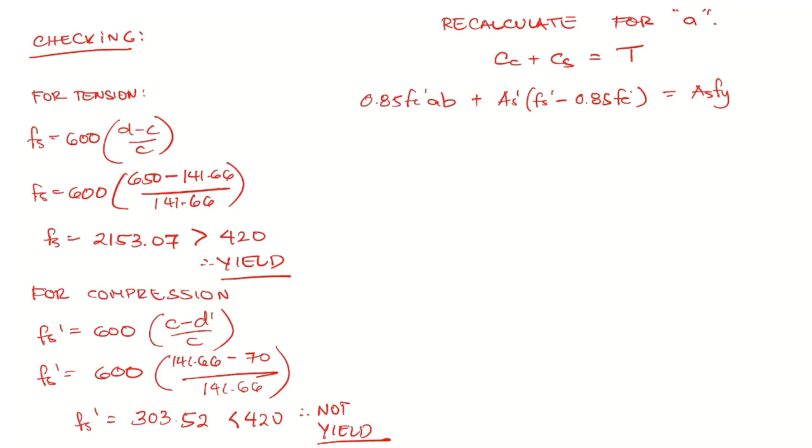Substituting the values, we know that A can be changed to beta 1 C. We can replace it with beta 1 C. Fs prime we are going to change to 600, C minus d prime over C. So substituting that, we have 0.85 Fc prime, beta 1 C, B, plus AS prime, Fs prime, that is 600, C minus d prime over C.

So minus 0.85 of Fc prime is equal to AS Fy. So the only unknown here is value of C. So we can substitute the value now. 0.85 of Fc prime, that is 21.

Beta 1 is 0.85. C, we don't know C. B is 450 plus AS prime. This is AS prime, AS prime is 3 pi over 4, 36 squared. 3 pi over 4, 28 squared. Multiply by 600. C minus 70 over C minus 0.85 of Fc prime 21 is equal to AS Fy, that is AS is apat na 36, 4 pi over 4, 36 squared, multiplied by Fy 420. So what's the value of C?

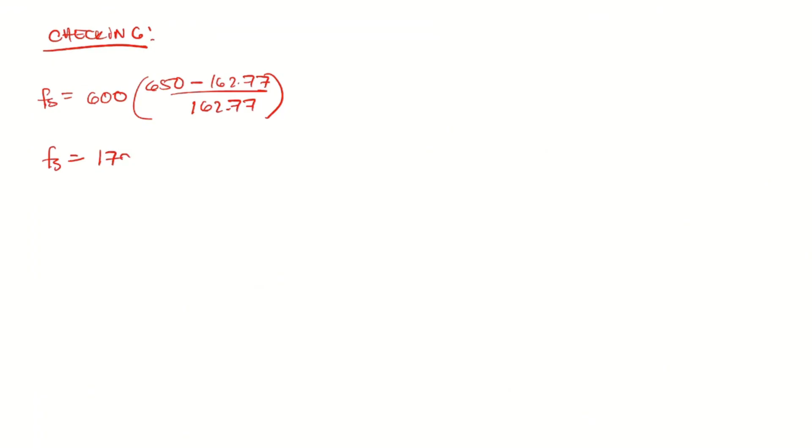1796.02. And this is greater than 420, so still yield. Still yields.

Still yields. For Fs prime, calculating for Fs prime, that is 600. That is 162.77 minus 70 over 162.77. What is our Fs prime now? We have 341.97, which is less than 420. So this is not yield.

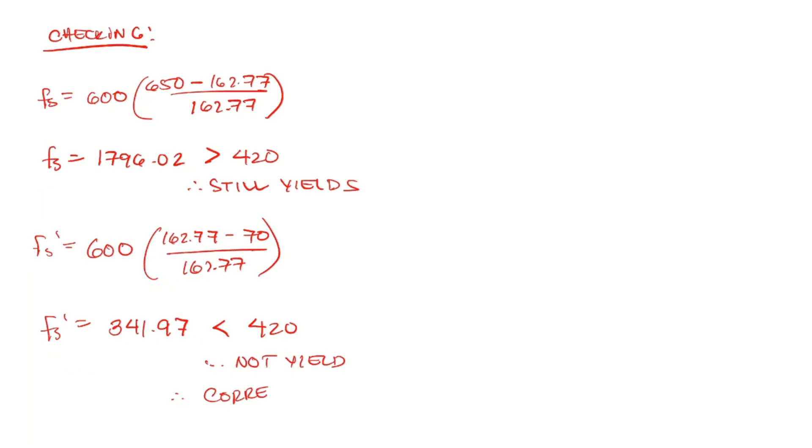Correct assumption, okay. So we have a correct value of A. So we are correct with our assumption. So let's calculate our capacity. We can now calculate for the capacity.

We have AS and then AS prime. This is the value of, this is the depth of the compression block, A. So we have compression due to concrete and then compression due to steel. And this is our tension force. This will be our axis of rotation. This is our axis of rotation. So the distance from the compression of concrete to the tension force, that is D minus A over 2. This is D minus D prime.

Okay, so calculating for the nominal moment, Mn is equal to compression due to concrete multiplied by D minus A over 2 plus compression due to steel multiplied by D minus D prime. So now our compression due to concrete is 0.85 FC prime AB multiplied by D minus A over 2. Our CS is AS prime. We are not going to use FY because our CS is not yield. Hindi po siya nag-yield. So what you're going to use here is Fs prime minus 0.85 of Fc prime multiplied by D minus D prime.

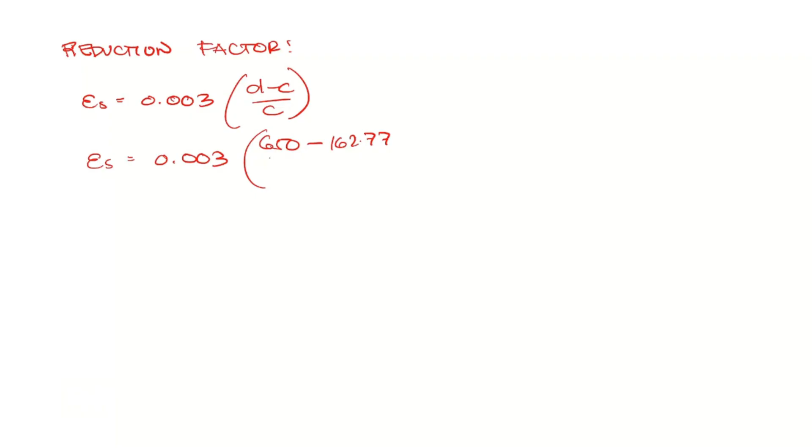So after this, we need to calculate for the reduction factor. Our reduction factor is dependent on the strain. So calculating the strain, that is 0.003, D minus C over C. So that is 0.003, the effective depth is 650 minus C, which is 162.77 over 162.77. What is our steel strain? 0.00898, and this is greater than 0.005. So what can we say about our section?

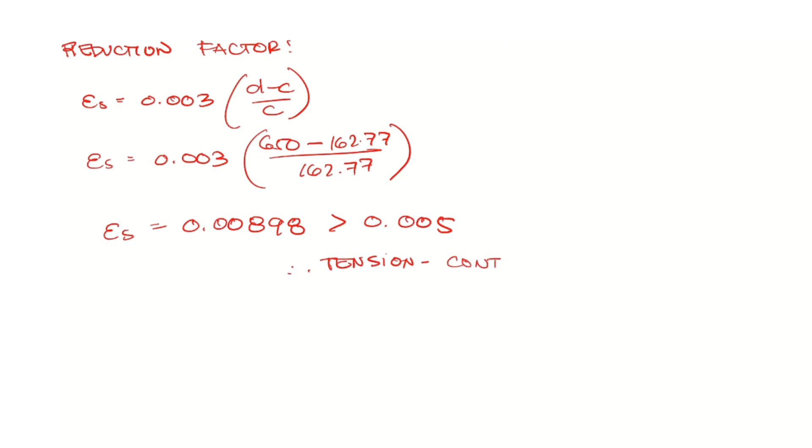This is tension controlled. If our section is tension controlled, your phi factor is 0.9. You can now calculate for MU. MU is phi Mn. Our phi factor or reduction factor is 0.9 multiplied by nominal moment, that is 992.73. What is our ultimate moment? 893.46 kilonewton meter.

Okay, so that's how you deal with problems with compression steel not yielding. Kapag po hindi yield, you just change the equation to 600 C minus D prime over C.

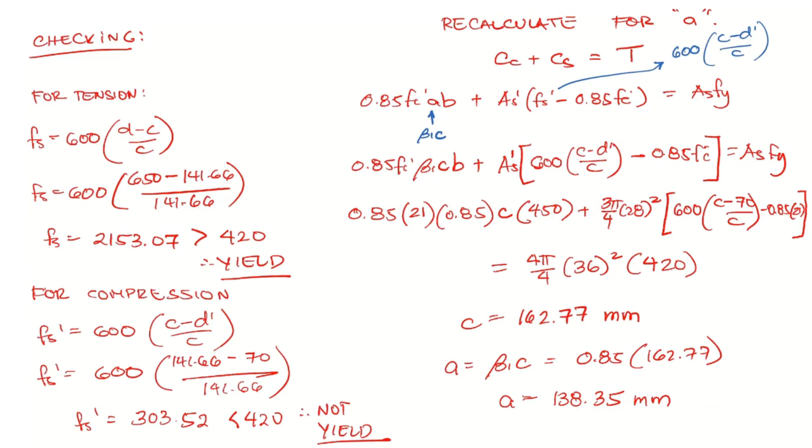Any question about this problem? Any question po? Any question about doubly reinforced? Any question about doubly reinforced po?